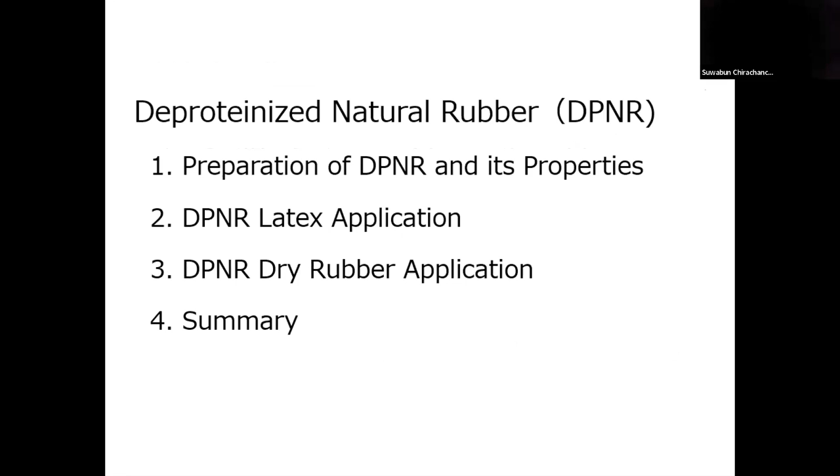Proteins are decomposed by added enzyme and replaced by surfactant. This treated latex is then diluted with water and DPNR is obtained after eliminating the decomposed protein through centrifugation. This scheme shows the actual production process of DPNR latex.

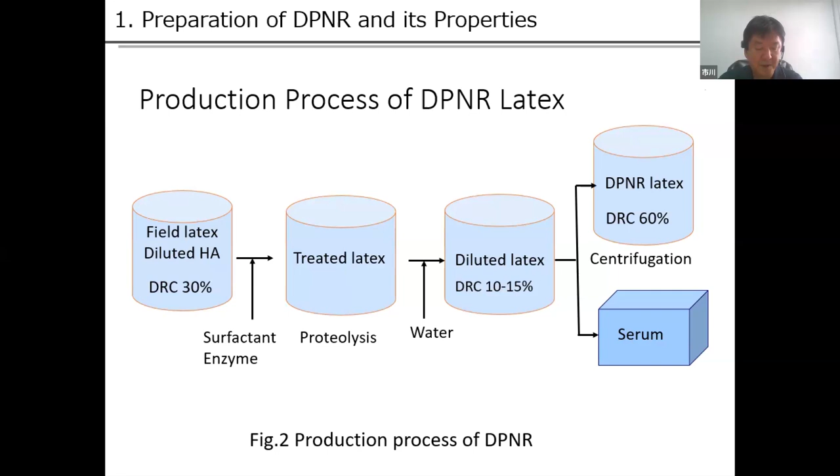We can use field latex or concentrated latex as raw material. Obviously, cost-wise, field latex is more advantageous. The degree of deproteinization depends on the activity of the enzyme and the dilution rate before centrifugation. We use highly active proteolytic enzyme and dilute treated latex to 10 to 15% DRC before centrifugation.

This table shows the specification of our DPNR latex. We have two grades of DPNR with different nitrogen content. The nitrogen content is measured by the Kjeldahl method. Nitrogen content is used as an index of residual protein quantity. Later, I will explain the allergenicity of DPNR latex.

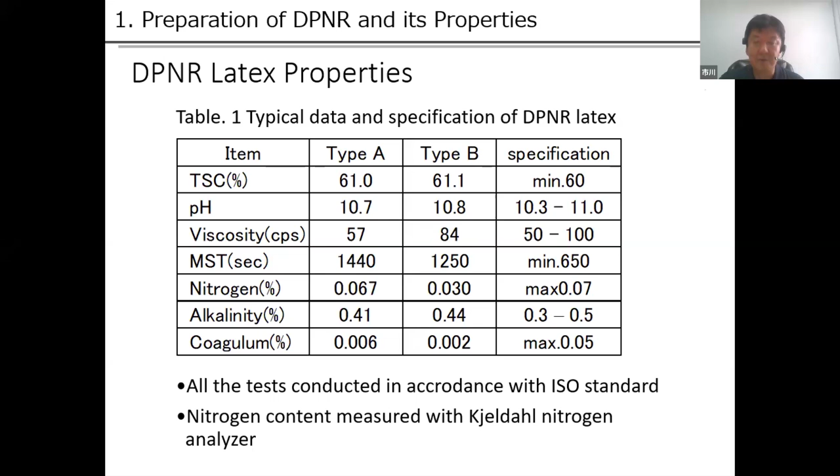Viscosity increases with deproteinization, and enough mechanical stability is obtained by selecting the surfactant. At the same time, sensitivity to coagulant is adjusted by selecting the surfactant. This figure shows the film thickness of DPNR latex and high ammonia natural rubber latex at different coagulant concentrations. DPNR latex has almost the same sensitivity as high ammonia natural rubber latex.

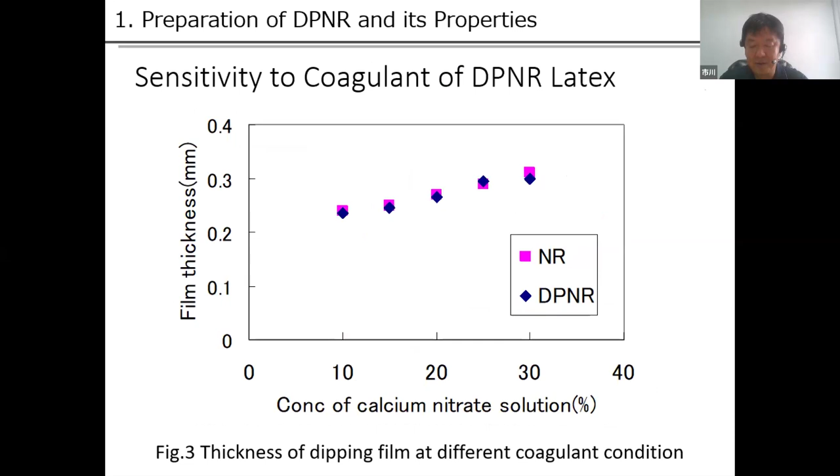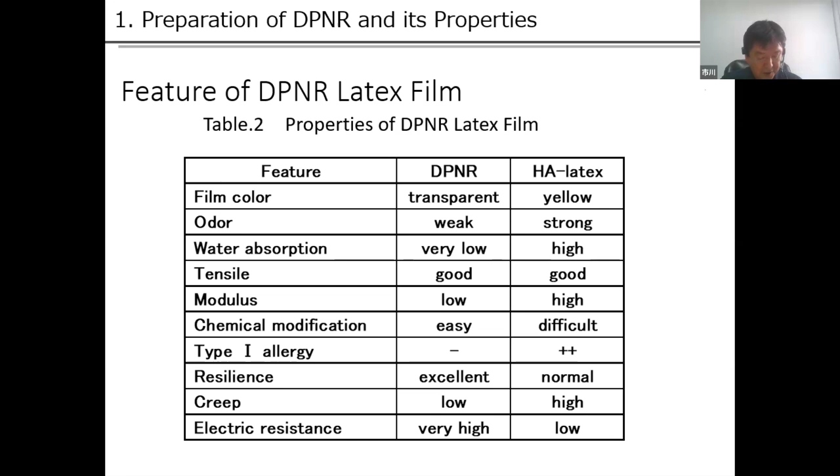Next, I show the summary of the features of the film obtained from DPNR latex. Film color of DPNR is transparent, odor is weak, water absorption is very low, modulus is low, chemical modification type 1 allergic reaction is negative, resilience is excellent, creep is low, and electric resistance is very high.

Here I show the IR spectrum of DPNR and NR. We can see the difference at 3300 wavenumbers. NR shows strong absorption, but DPNR does not show absorption because proteins are decomposed and removed. We can differentiate DPNR from NR.

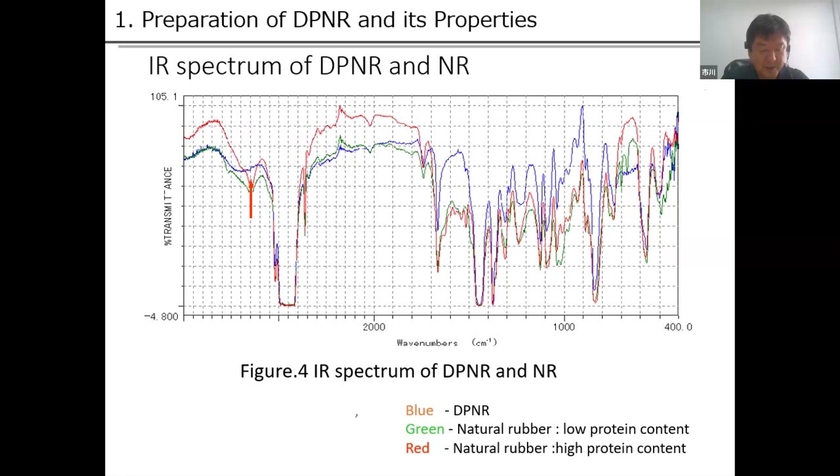We also measured antigenic protein content from the result of a LEAP assay. Antigenic proteins could not be detected from DPNR latex film.

DPNR latex can be used for many applications which utilize its features, especially low allergenicity and softness. We apply DPNR to these purposes.

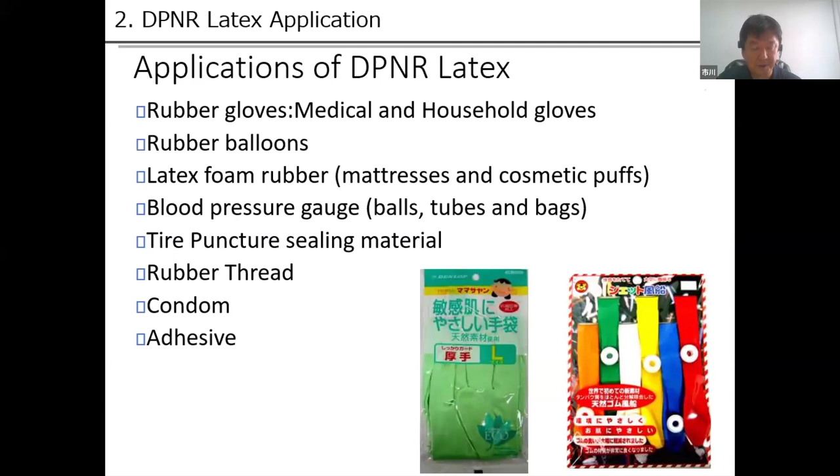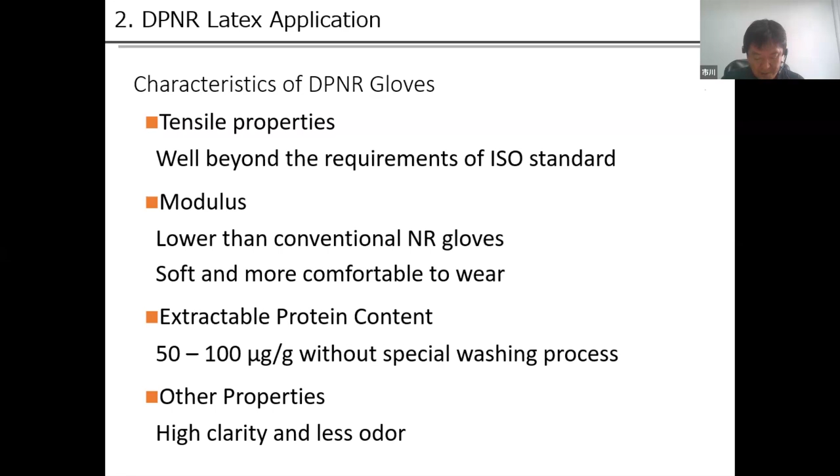I will talk about allergenicity of DPNR glove. At first, I talk about extractable protein content. This figure shows the residual extractable protein in commercial gloves. The EP content was measured by ASTM standard method that is modified slightly. As you can see, EP content of recent commercial gloves are well controlled to less than 100 microgram per gram. Our DPNR gloves are found to be in the same EP level.

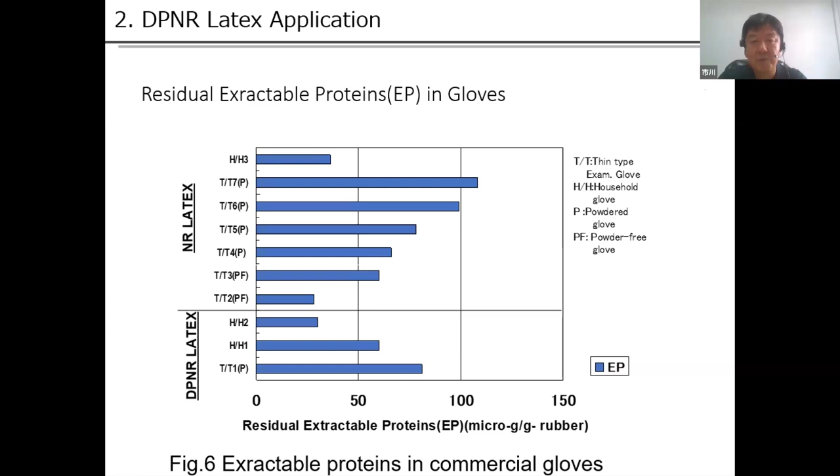This graph shows the relation between extractable protein content and allergen protein content. Theoretically, extractable protein quantity should be proportional to the allergen protein quantity, but in the case of DPNR, allergen proteins are extremely low against the extractable proteins.

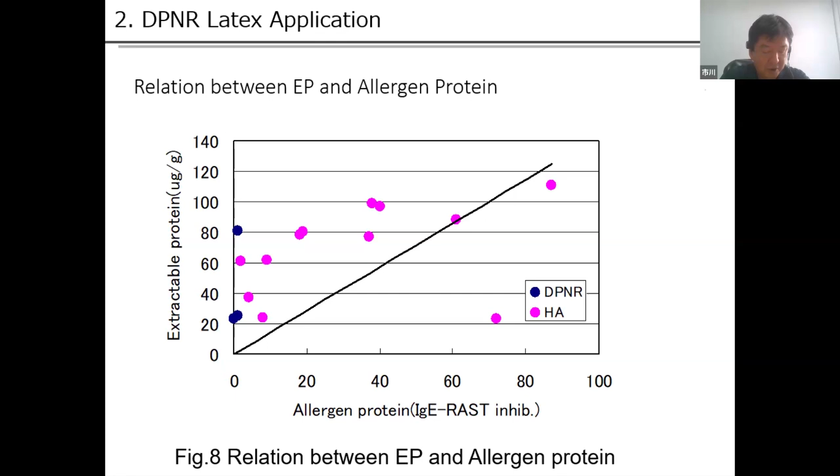This diagram is easy to understand the said relation. Now DPNR is the same EP level as NR. But allergenic protein is not detected in DPNR while it is highly detectable in NR.

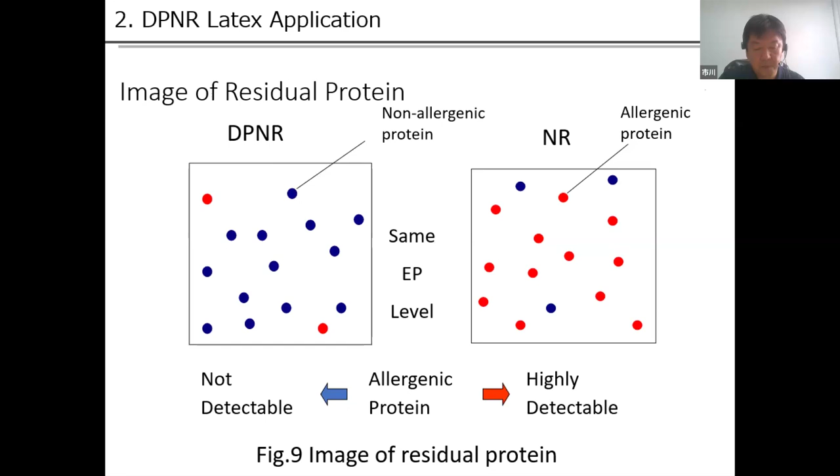Next, I will show the result of clinical testing. One is use testing with one finger of a latex glove for one allergenic patient. This test was carried out in Nagoya University School of Medicine. In this case, the DPNR glove allergenic reaction was negative, while the normal NR glove showed positive.

The other is a scratch prick test with 23 allergenic patients. This test was carried out in a total of 13 domestic universities or national institutes. As you can see, our DPNR has excellent effect for patients who are allergic to protein. Extraction of DPNR glove showed positive rate of less than 10%, while extraction of natural glove showed about 80%. These results show that DPNR is effective to prevent NR protein allergy.

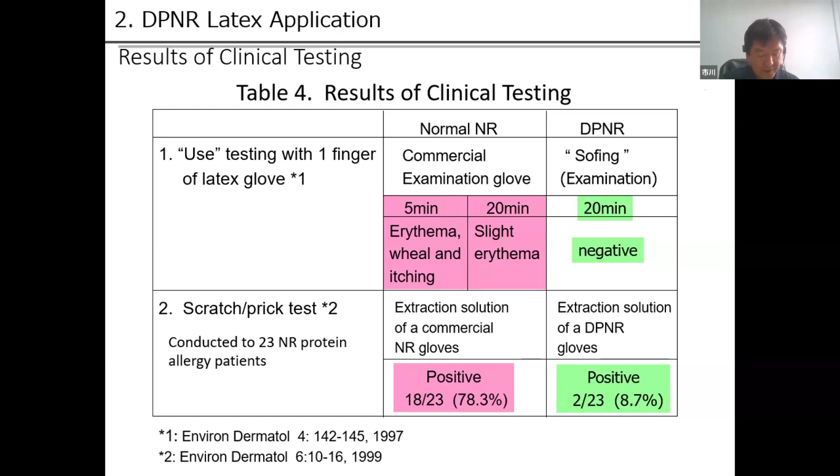Next, I will talk about DPNR solid rubber. We prepared DPNR solid rubber from DPNR latex produced by our standard procedure. DPNR latex was coagulated with dilute formic acid and dried. DPNR solid rubber has low gel content and low nitrogen content. But other properties do not show clear difference with natural rubber.

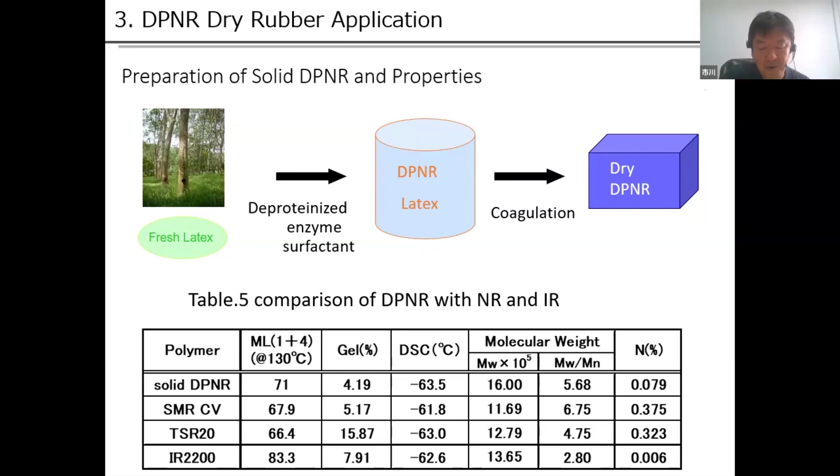We evaluate the vulcanized rubber properties of DPNR with these rubbers. Here I show the cure characteristics of unfilled compound of DPNR, NR, and IR. DPNR shows slow curing speed compared to NR. Tensile properties were well maintained and show lower modulus than NR.

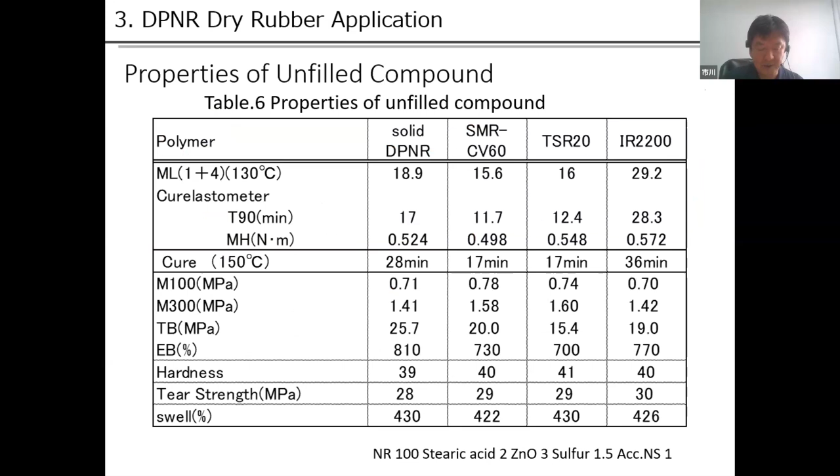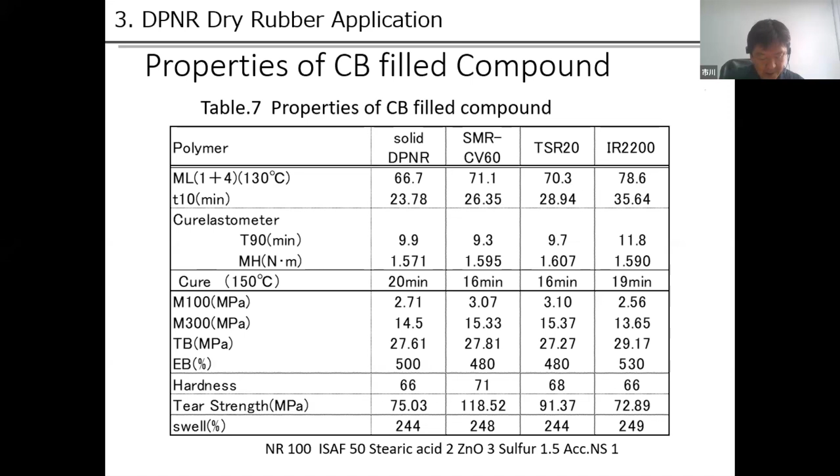Next, I show the cure characteristics of carbon black filled compound of DPNR, NR, and IR. Curing speed was not so much different between DPNR and NR in case of carbon black filled compound. Tensile properties were well maintained and show lower modulus than NR, but tear strength of DPNR was lower than NR. Tear strength was close to the tear strength of IR.

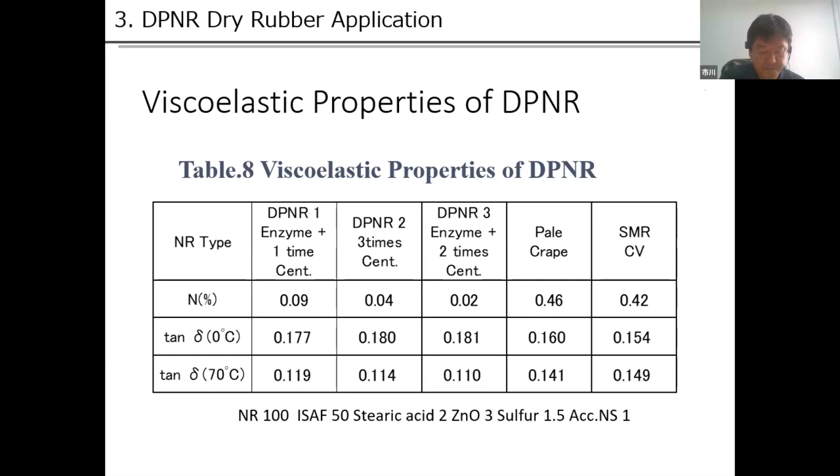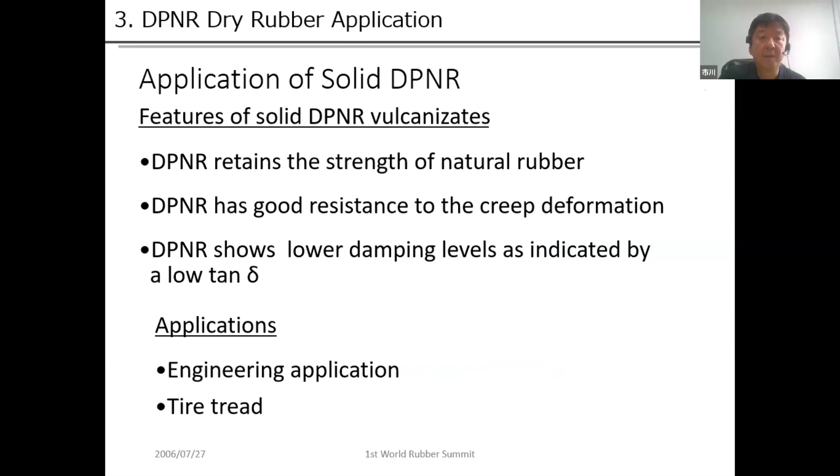Here I summarize the solid rubber features, and this is a summary of DPNR. DPNR latex products show quite less allergenic potential according to the measurement of allergen and antigens. DPNR latex products have softness and are more comfortable to wear as gloves. DPNR retains the strength of natural rubber and also has good resistance to creep deformation, with lower damping properties.

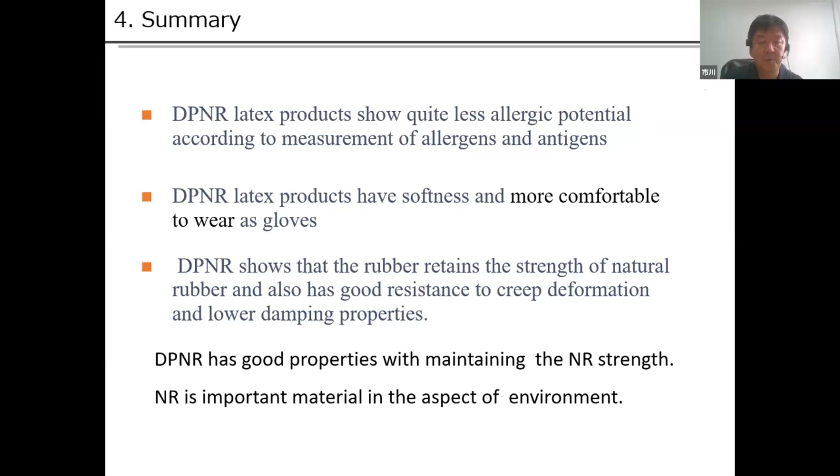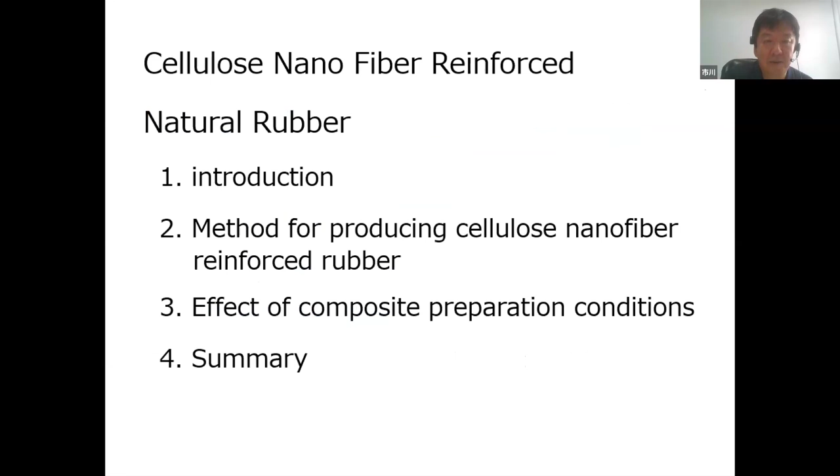I will move to the next topic, cellulose nanofiber reinforced natural rubber. I will explain following this content. At first, I will talk about cellulose nanofiber. We can get cellulose nanofiber by decomposing a cell wall from plant tissue. Cellulose nanofiber has high strength, low thermal deformation, and low weight, and it is an environmentally friendly material.

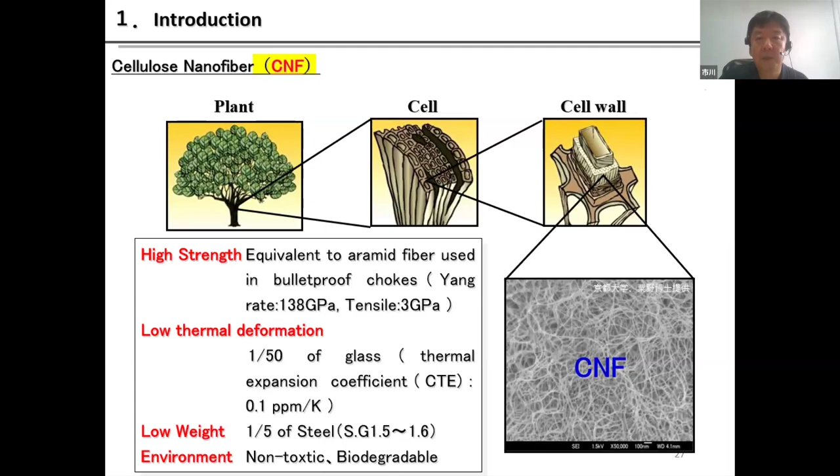To develop tire compound, we have to develop techniques utilizing the characteristics of CNF: high rigidity, low specific gravity, and natural resources. Then we can improve tire performance and promote the development of elemental technology necessary for manufacturing with low dependence on oil resources.

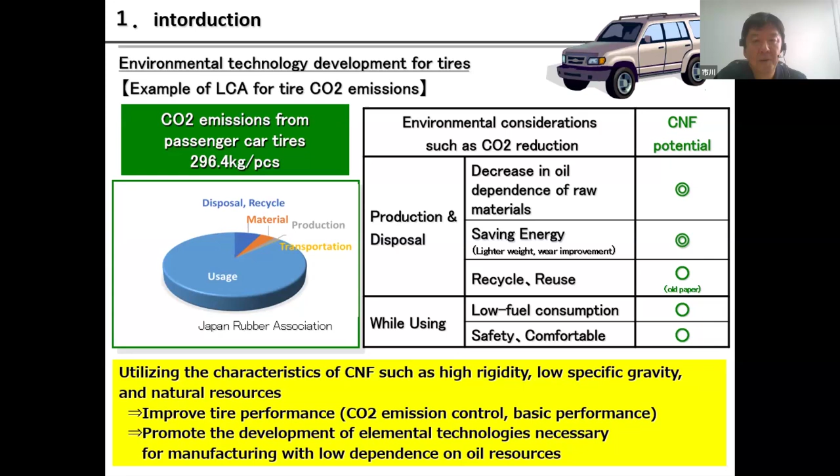And we can get CNF from many kinds of plants, from tree to cotton and bamboo. We can get it from many plants.

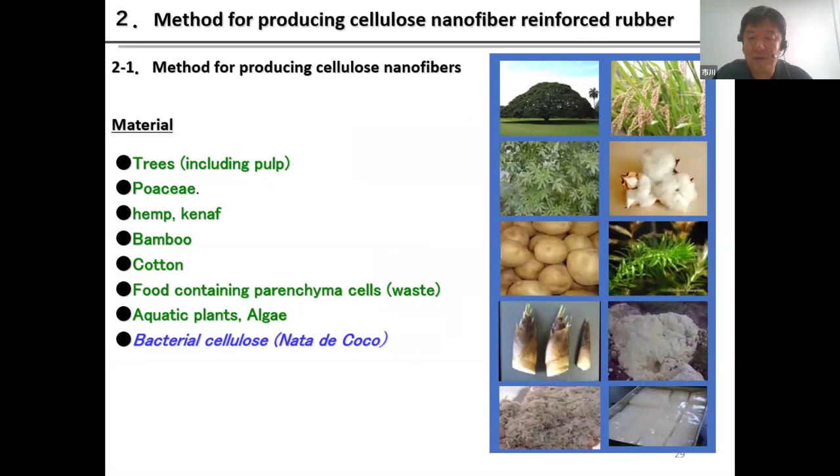Here I will explain the preparation method for cellulose nanofiber and rubber composite. Firstly, I explain a method for producing cellulose nanofiber. As I told, CNF can be obtained by loosening plant tissue into small pieces. We can get CNF using equipment with physical stress, like high pressure homogenizer, grinder, or screw extruder.

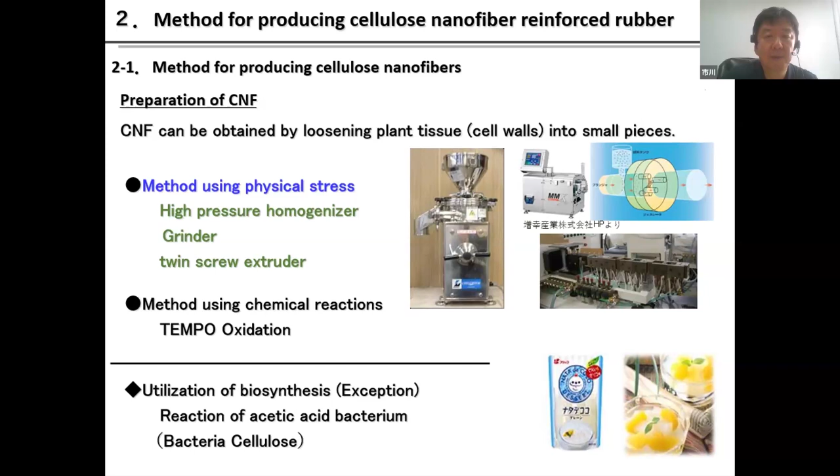We can get CNF by chemical treatment like TEMPO oxidation. And some bacteria produce cellulose nanofiber also. I show the example for preparation method.

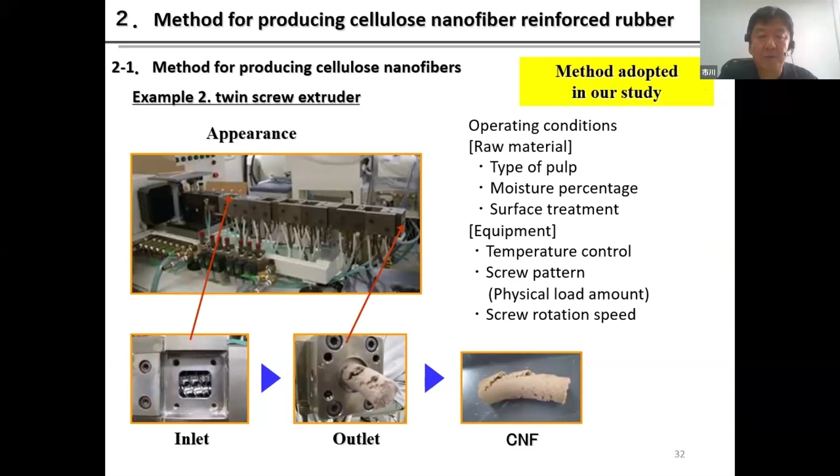One is grinder. Using a grinder, we can get CNF through the grinder slit. In our study, we use a twin screw extruder to prepare CNF, changing raw material condition and equipment conditions. We supply wood pulp to the twin screw extruder. After passing through the twin screw extruder, we get CNF.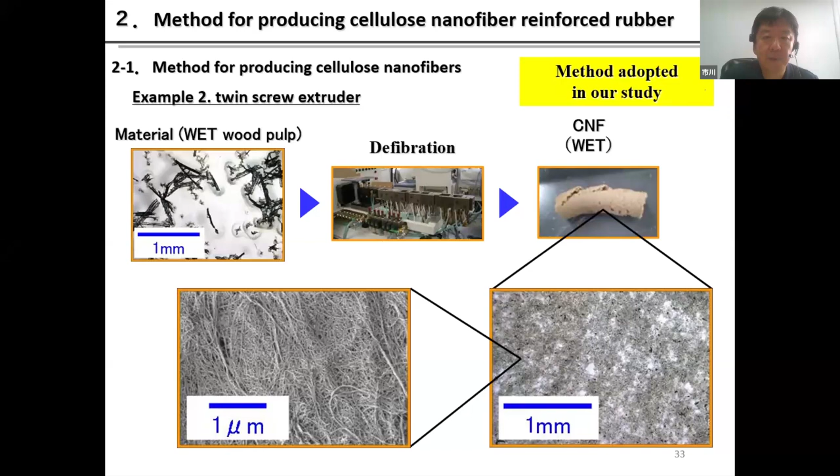Next, I show the composite method of CNF and rubber. If we try to make a composite at dry condition, CNF cannot be dispersed in rubber because of strong intermolecular interaction. We get a morphology where it still remains a fiber. So we use a wet blend method: we make a composite CNF slurry with rubber latex, mix, then coagulate and dry. Then we can get the rubber CNF composite.

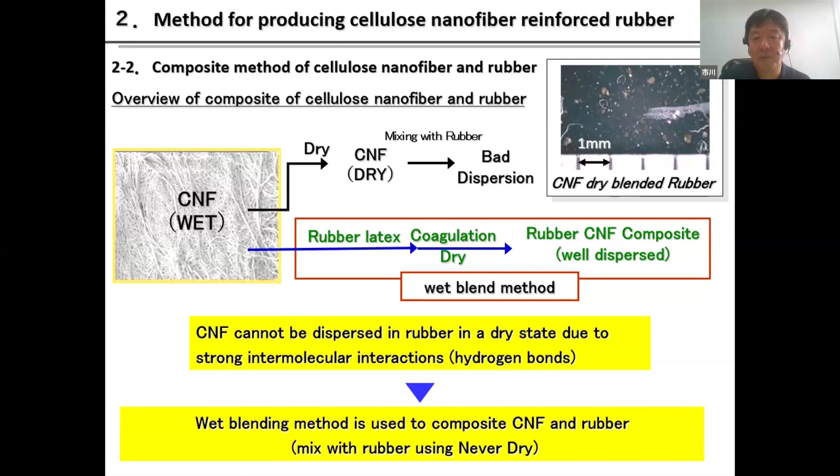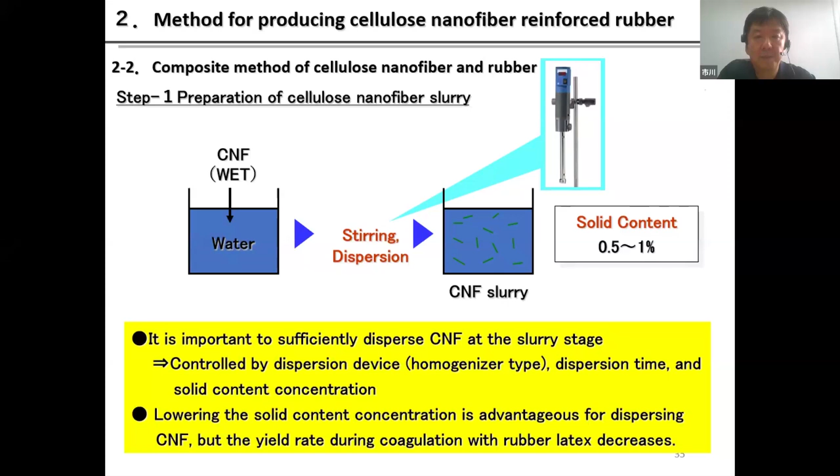I'll show you the actual process from slurry preparation. We put the CNF into water and stir to disperse it into water. We have to control solid content because the water becomes very viscous. Then we apply solid content of 0.5 to 1%. After getting CNF slurry, we mix with latex and stir, then coagulate, wash, dehydrate, and dry. Then we can get CNF and rubber composite.

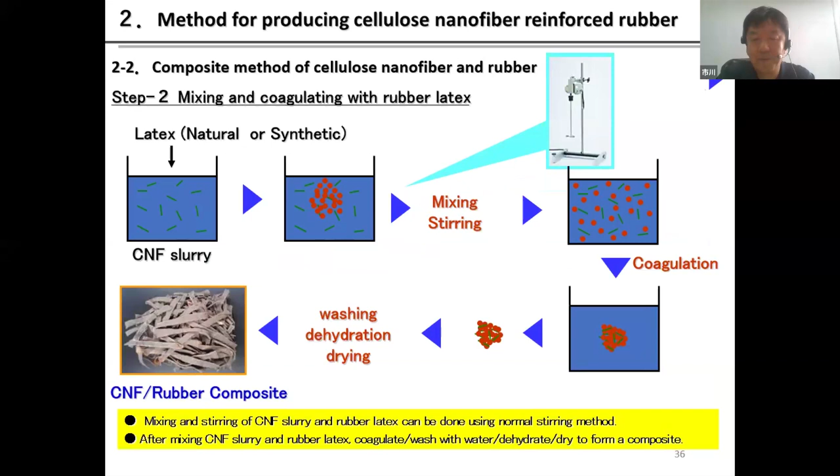After getting a composite, we plasticize the composite with a 2 roll mill or internal mixer. Then we add a compounding agent and vulcanizing agent. After mixing, we vulcanize at 150 to 170 degrees Celsius. Then we get the CNF reinforced rubber vulcanizate.

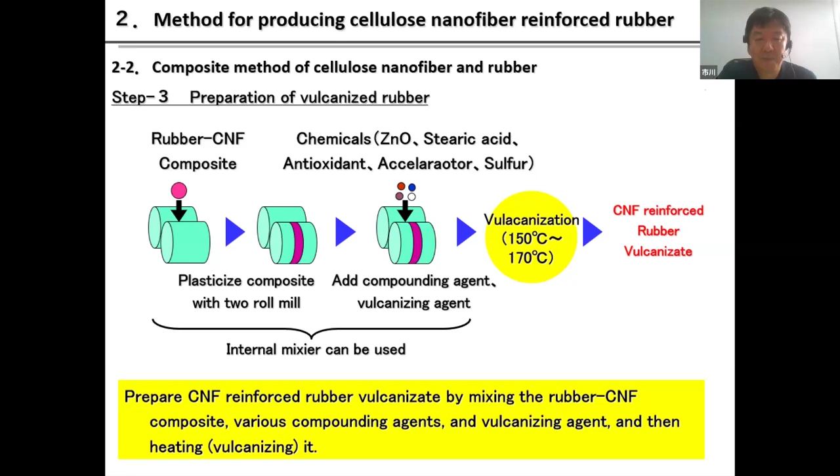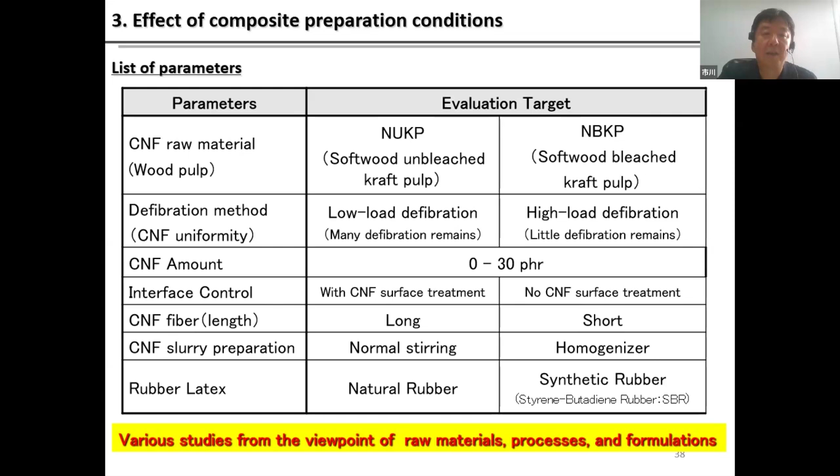We change the parameters: raw materials, process, and formulation. Then we study the effect of these parameters. At first, I show you the result.

We use unbleached kraft pulp and bleached kraft pulp. In case of bleached kraft pulp, it contains no lignin, but in case of unbleached, we get lignin content of 5 to 7%.

This is the SS curve of CNF reinforced rubber. NUKP contains lignin, and NBKP has no lignin. Natural rubber vulcanizate reinforced with NUKP-derived CNF has the same elongation at break, but higher rigidity and higher strength. Lignin affects the rigidity in this case.

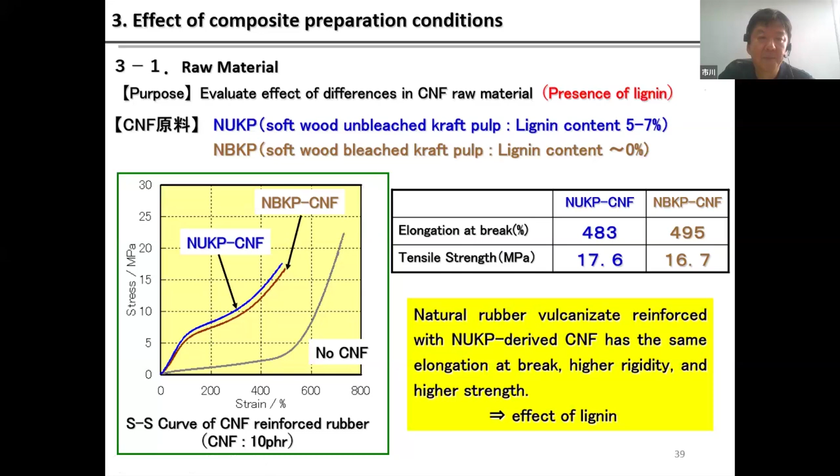Next, I show the effect of different defibration levels. We change the defibration load, low and high. In case of low load, many undefibrillated fibers remain. In case of high load, undefibrillated fibers remain little.

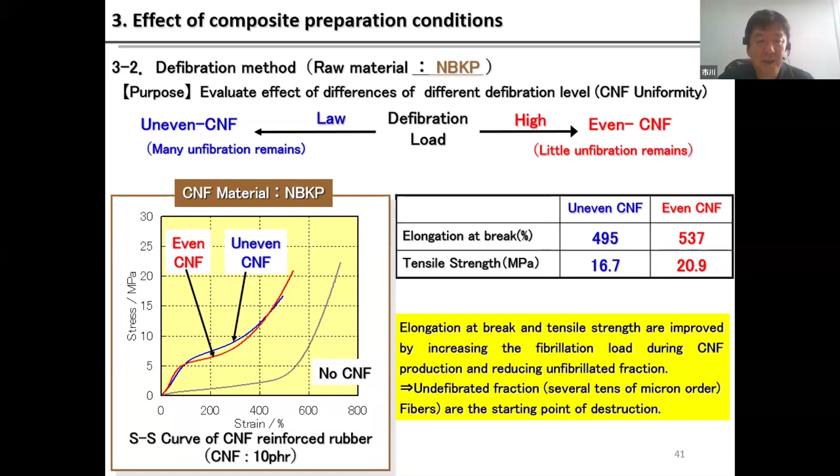This is in case of NUKP, and next is NBKP, needle bleached kraft pulp. We can get the same result with NUKP.

Next, evaluate the influence of CNF amount introduced on rubber properties. We put 10 phr, 20 phr, 30 phr. Result is this: increasing the amount of CNF introduced improves the elastic modulus. However, it is accompanied by a decrease in elongation at break. So it is necessary to control the amount of CNF introduced by considering the balance between rigidity and fracture characteristics.

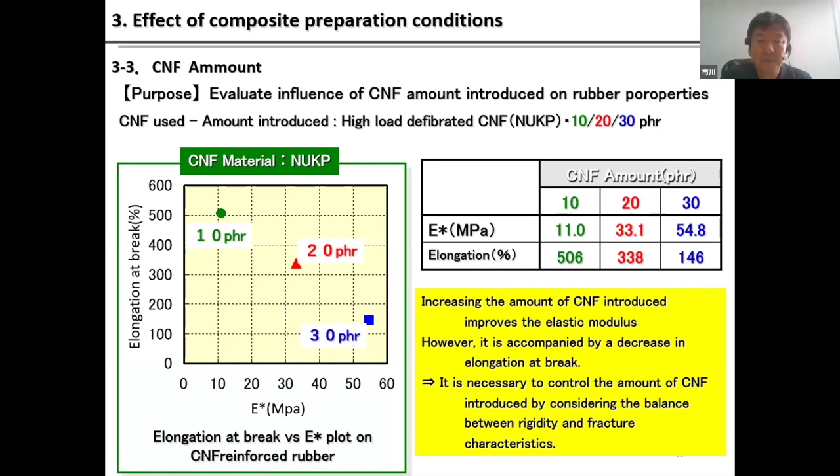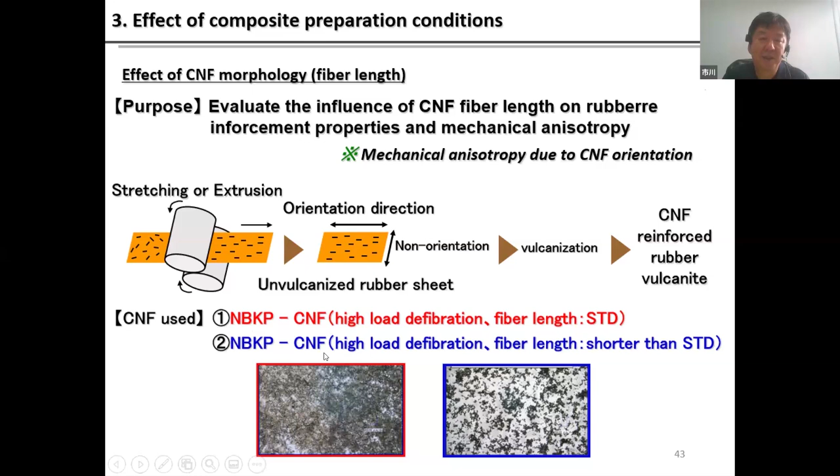Next, I show you the evaluation to know the influence of CNF fiber length on rubber reinforcement properties and mechanical anisotropy. After cold roll mill or extruding, CNF oriented in this direction, so we check the effect of this orientation. And we use two kinds of CNF: one is standard length CNF, another one is shorter CNF.

Here I show SS curve of rubber itself and rubber with shorter CNF and standard CNF. If we put the standard longer CNF, we had higher modulus. And if we see the anisotropy between orientation direction and other direction, in case of longer CNF, it has difference. But in case of short fiber length, even in different directions, it is not so much different. So fiber length has a strong influence on the stiffness of rubber, and mechanical anisotropy becomes apparent as the fiber length increases.

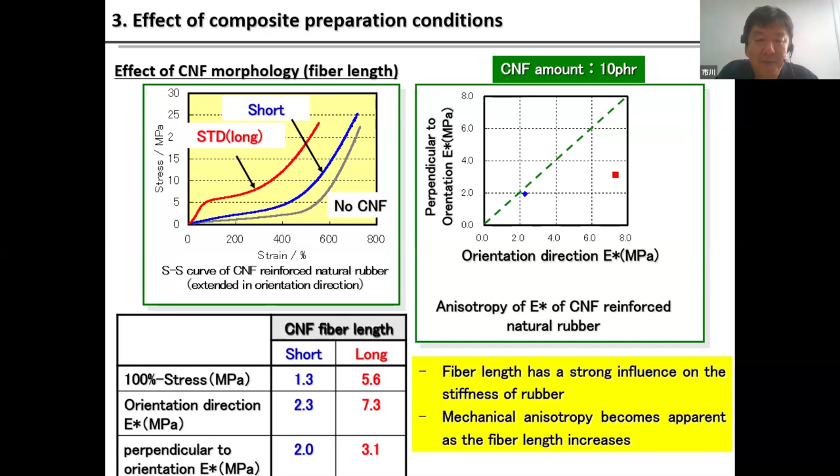I explained when we put CNF into natural rubber, but here I show you the difference when we put CNF into natural rubber and SBR. In case of natural rubber, we can see the effect from 5 phr, but in case of SBR, we can see the effect of CNF from a higher amount. The amount of CNF introduced at which the reinforcing effect begins to appear varies depending on the rubber.

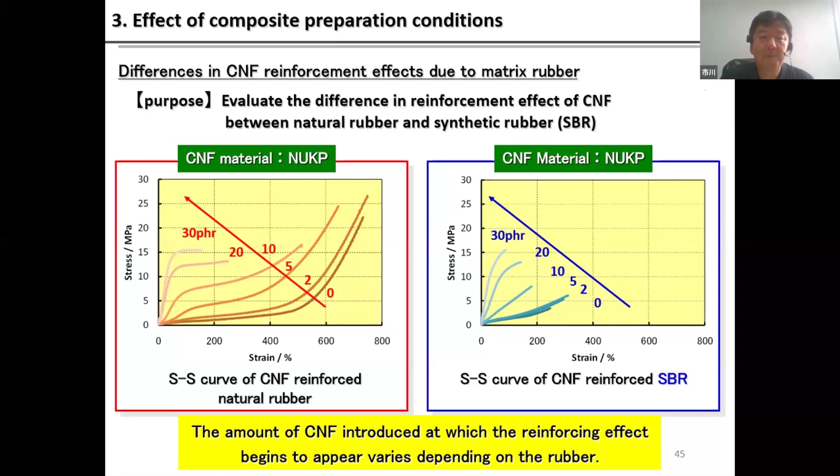Here I summarize our testing result. I didn't explain about interface control, but rubber-CNF interface affects fracture properties. I think this is an important matter for this development.

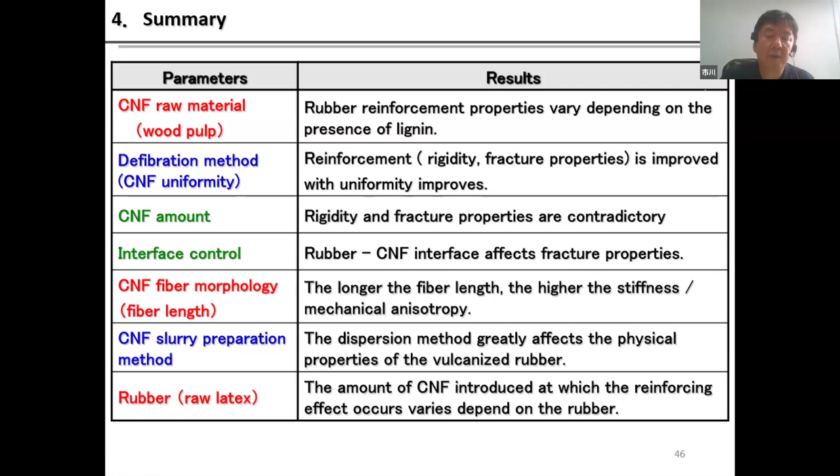Next, I want to move to the final topic, current issues for the natural rubber industry. Natural rubber absorbs CO2, and wood is used for it, so... is natural rubber really a sustainable material?

Just now I showed that rubber trees absorb a lot of CO2 to grow and produce latex, which ends up in thermal recycling to CO2. From this circulation, natural rubber itself is a sustainable material.

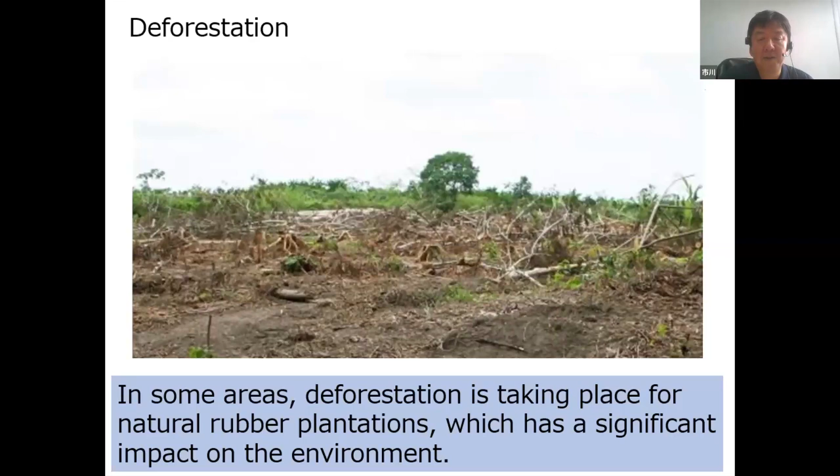But actually, deforestation is taking place for natural rubber plantations, which has a significant impact on the environment. And labor issues: yield varies by region and has a significant impact on the income of smallholders and tappers. They may also be placed in harsh working environments.

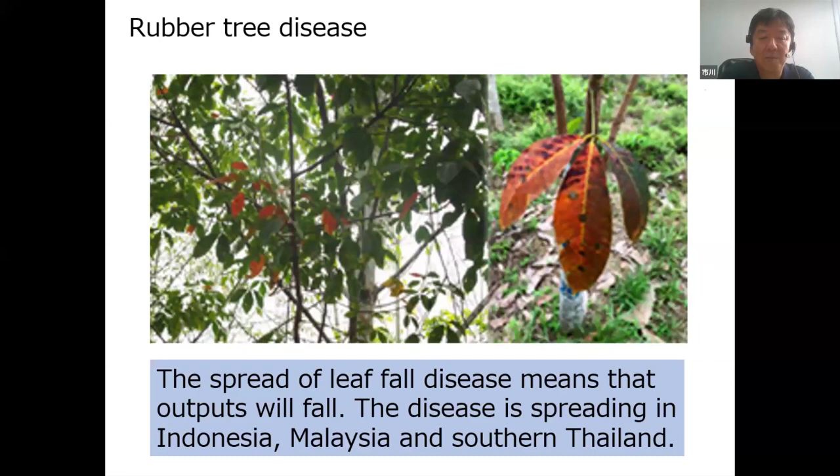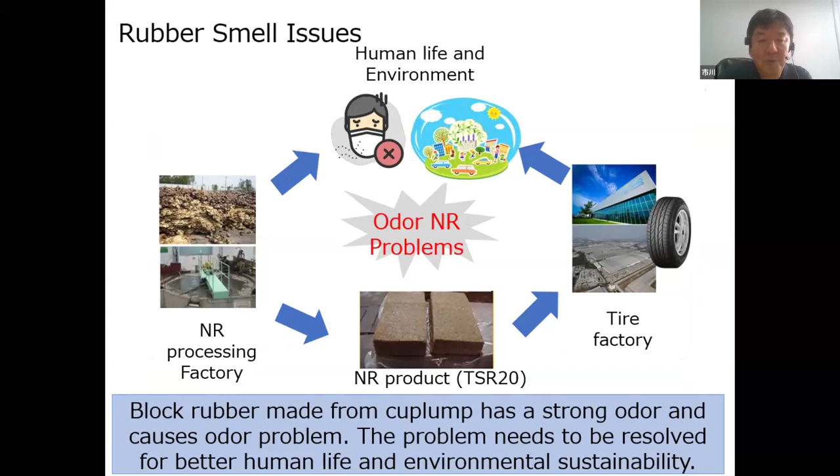And rubber disease: the spread of disease means that output will fall. The disease has spread in Indonesia, Malaysia, and southern Thailand. And rubber products have a smell issue. Block rubber made from cup lump has a strong odor and causes odor problems. This problem needs to be resolved for better human life and environmental sustainability.

In this situation, many challenges must be addressed and resolved to create and maintain a sustainable supply of natural rubber: environmental issues, social issues, and economical issues.

One is global sustainable initiatives. The Sustainable Natural Rubber Initiative, SNRI, was established in 2014 as a member voluntary collaborative project under the International Rubber Study Group framework.

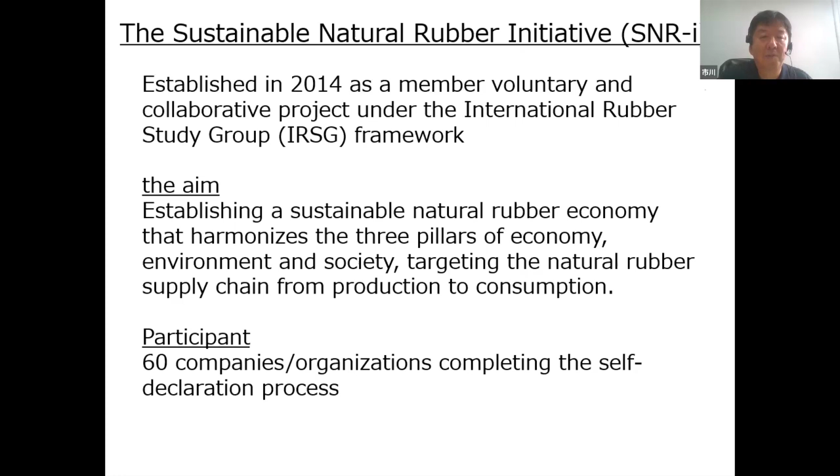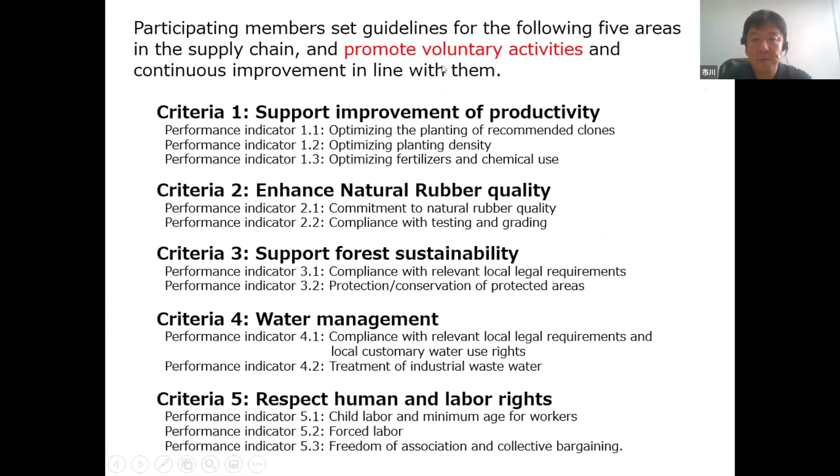The Global Platform for Sustainable Natural Rubber, GPSNR, established in 2018, led by major manufacturers, was established as an international platform for a sustainable natural rubber supply chain. This is also for a sustainable, equitable, and fair natural rubber value chain. GPSNR is setting up an assurance model based on a risk-based approach.

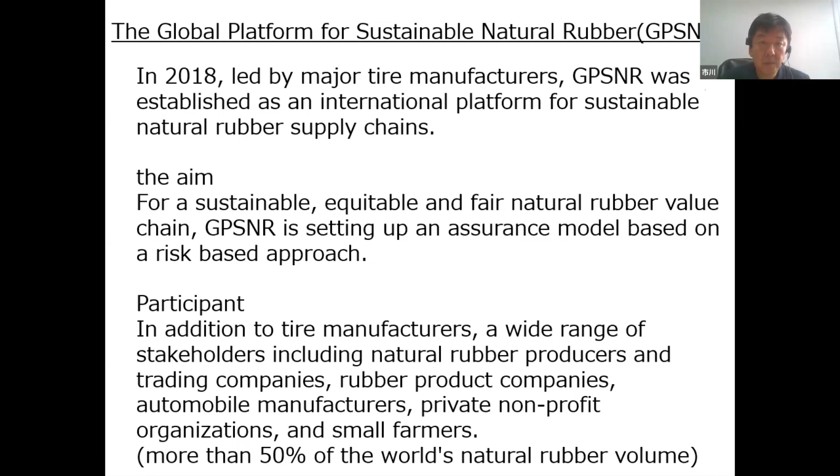Members act on a shared responsibility framework with three pillars: shared investment, value transfer and global setting, and knowledge and data sharing. And the policy component of the framework is spread across eight themes with commitments to it.

Currently, companies and organizations are working to build a joint natural rubber value chain based on the GPSNR framework, and to enhance the sustainability of natural rubber through their own activities based on SNRI. From here, I will show you our activity toward sustainability. Sumitomo Rubber Group established a sustainable natural rubber policy.

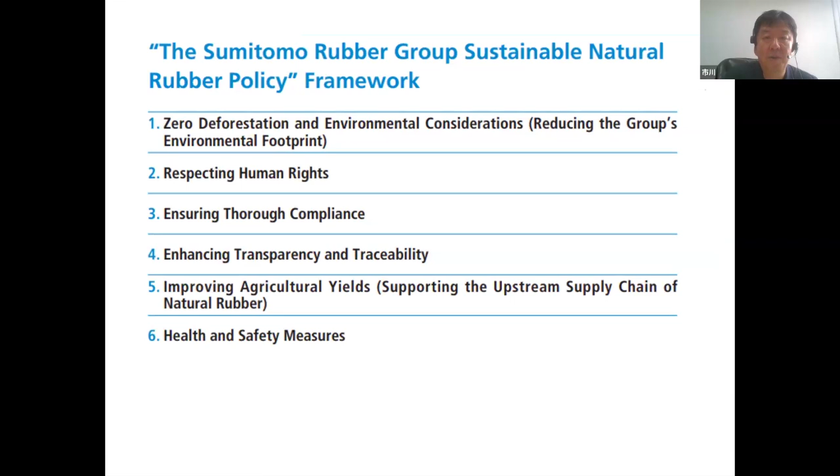This is a sustainable natural policy framework of Sumitomo Rubber Group. Sumirubber Thai Eastern Corporation also conducts activity for sustainability of natural rubber in accordance with the policy of the Sumitomo Rubber Group.

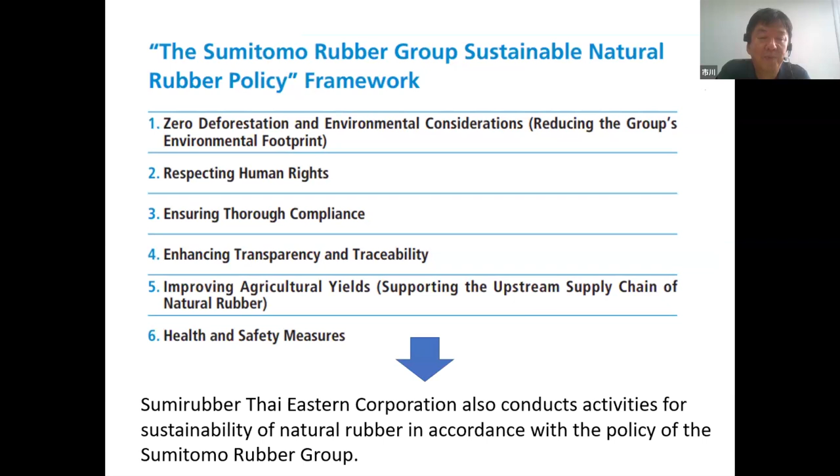Our activity for today, I will talk about our activity for sustainability: development, low odor natural rubber, environmental measures at factory, and upstream support activities.

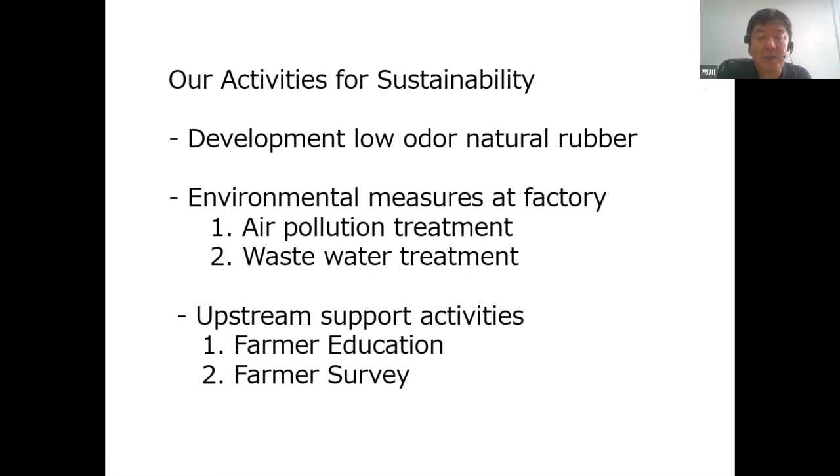At first, I explain about odor natural rubber problem. This problem needs to be resolved for better human life and environmental sustainability. From the material to product, we have to improve. For this purpose, we developed the less smell rubber. At first, we investigate the cause and actual process giving natural rubber odor, and find the improvement method for reducing bad odor at the factory.

I show the process from plantation to our final product. In our factory, we storage the cup lump, wash and dry, and make the final product. During this process, we investigate the cause of odor and find the improvement method for reducing the odor.

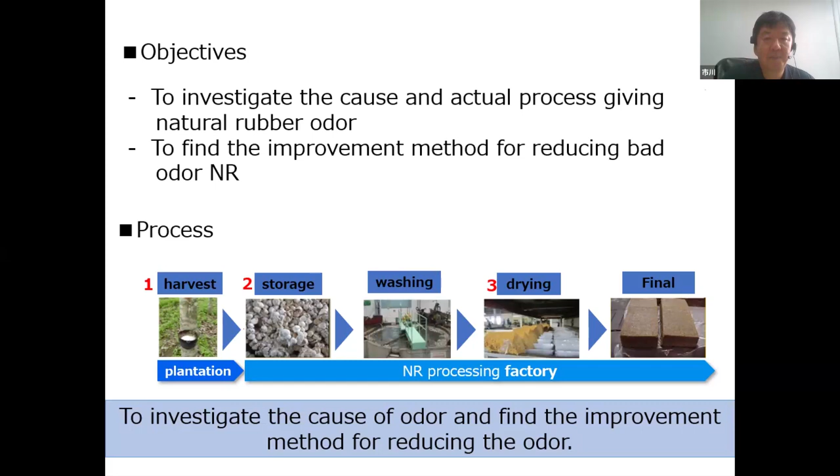I show you the source of odor in commercial TSR 20. One is short chain fatty acid. This is generated during storage by spoiling, and other chemicals are generated by heating. So substances which cause odor were generated during storage and drying process.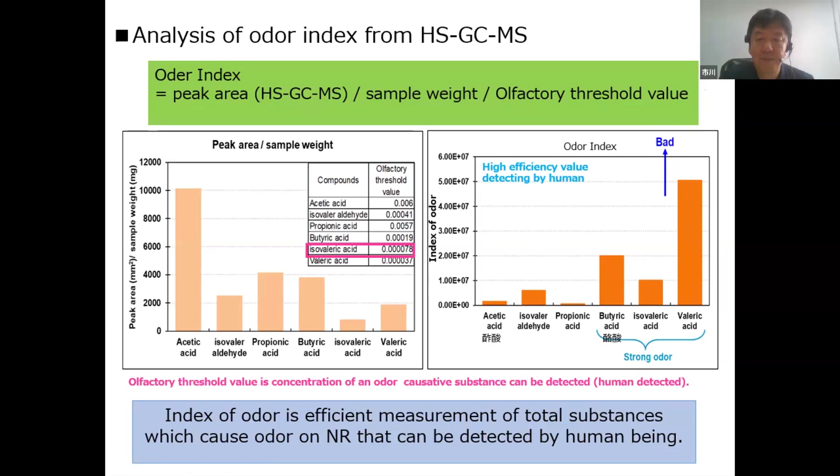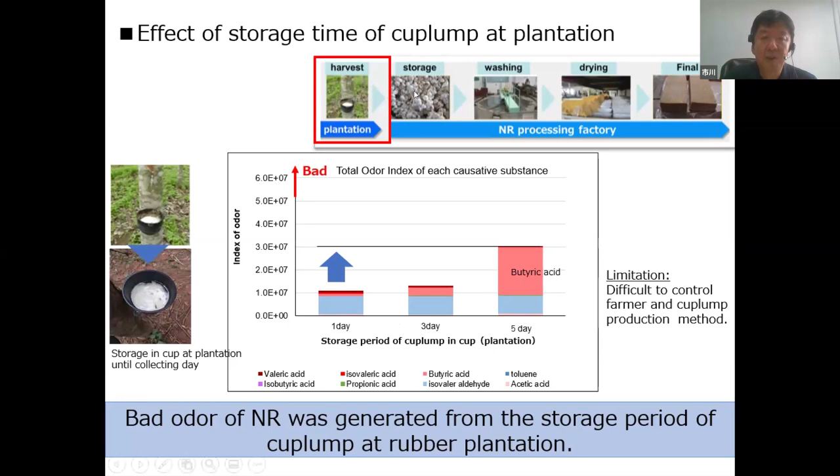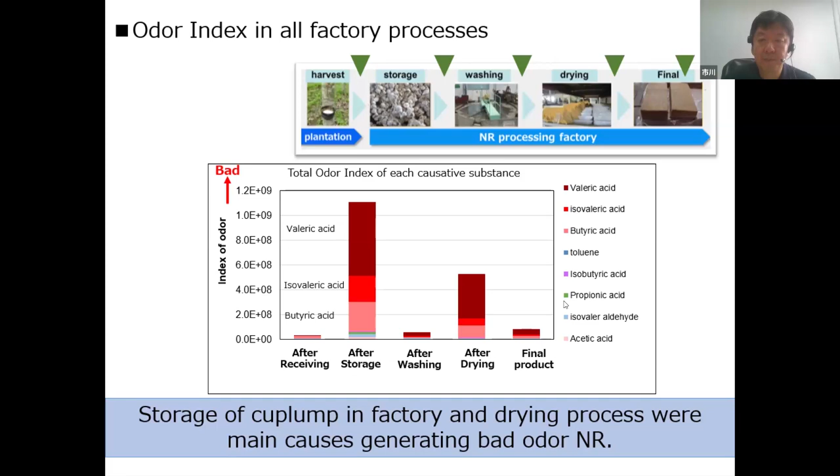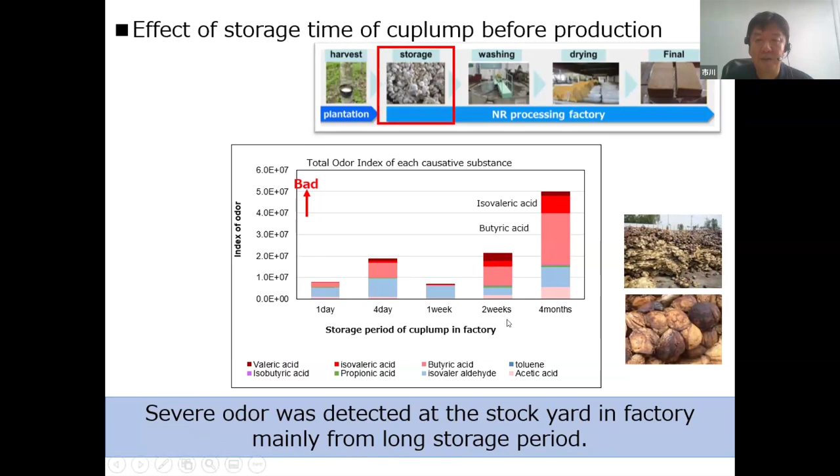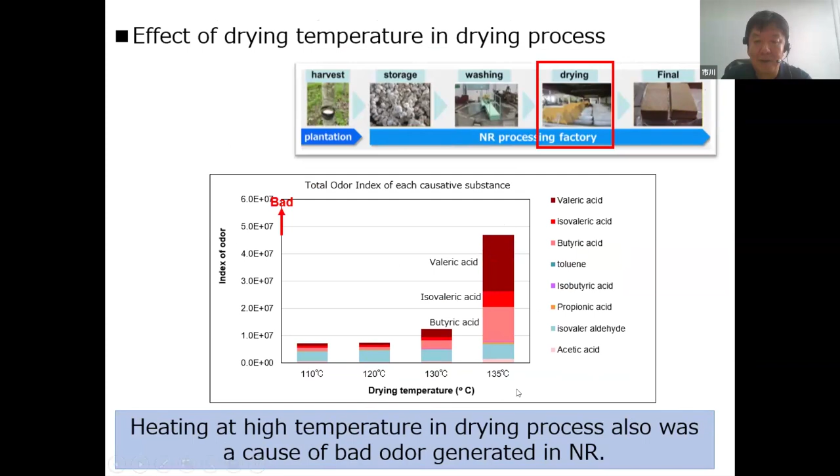Next, I show the effect of drying temperature in the drying process. Heating at high temperature, like 135 degrees, was also a cause of bad odor generated in NR. So we cut and wash the cup lump just after receiving from the plantation, and we try to reduce the drying temperature. Then we can lower the odor level. We succeeded in getting low odor NR through production process improvement.

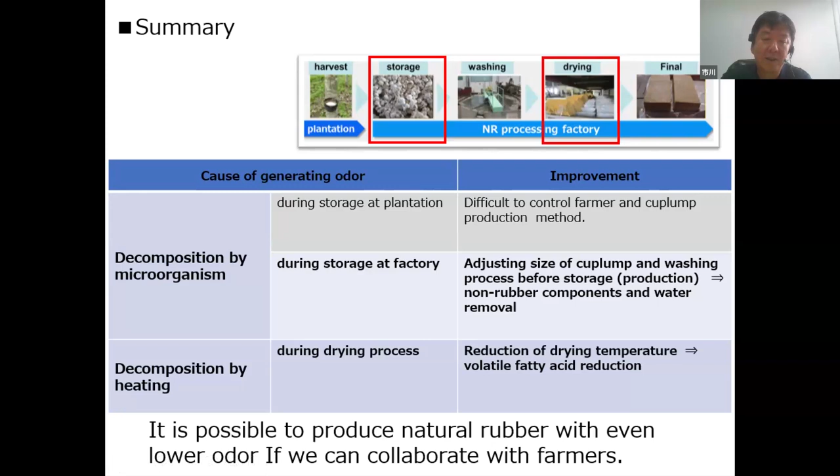At the plantation, we cannot control this part, but by controlling our storage and drying conditions, we can produce natural rubber with lower odor. If we can collaborate with farmers, we can produce less odor natural rubber.

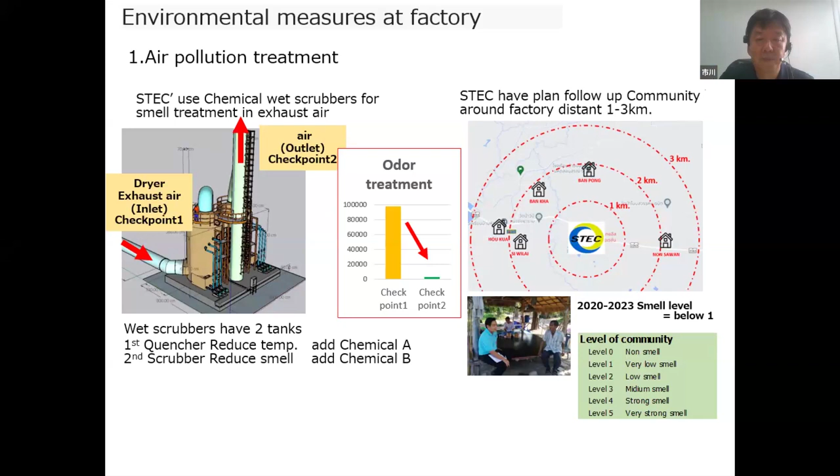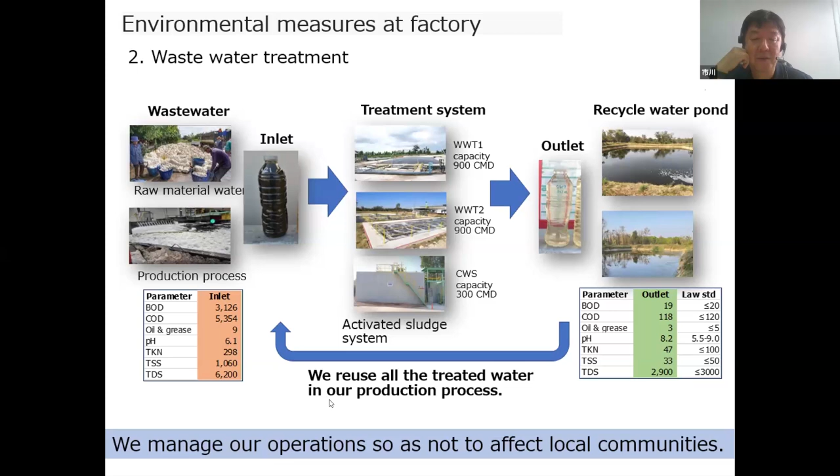Next, wastewater treatment. In our factory, we use 2,000 cubic meters of water per day, so we have 3 water treatment systems. We treat all the water, and we reuse all the treated water in our production process. We manage our operations so as not to affect local communities.

And upstream support activities: one is farmer education. We have conducted educational activities for smallholders. Another activity is farmer survey. We conduct a farmer survey to know their situation and to confirm whether the sustainable natural rubber policy is being followed.

I summarize these last topics in order to continue using natural rubber as a sustainable material. It is necessary to address environmental, social, and economic issues. In order to carry out these measures, cooperation from upstream to downstream is necessary. Most natural rubber is produced by smallholders, and the support of smallholders is important. I expect research and development to improve sustainability through industrial and agricultural technology.

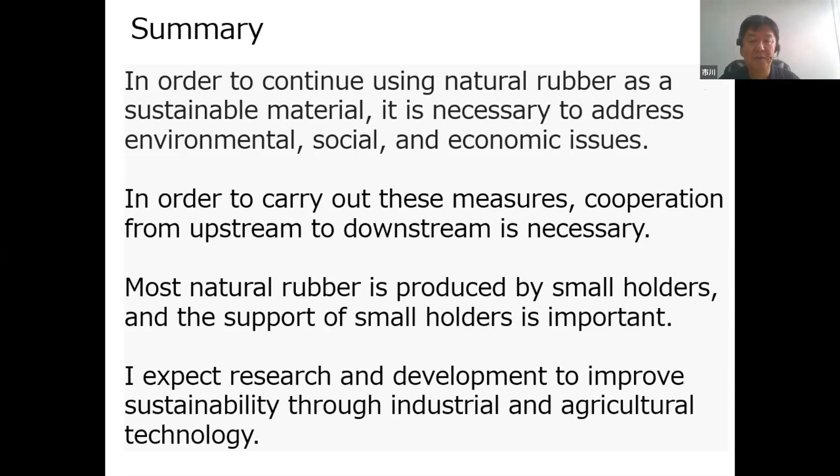Professor Tanaka received the ACS gold medal and contributed this paper to RCT. Although Professor Tanaka's research has enabled us to understand many things, there are still many things that are still unknown. Natural rubber is an important agricultural product for Thailand, and I hope that Thailand will continue to develop its technology as a producing country, including the industrial effort. Thank you for listening.

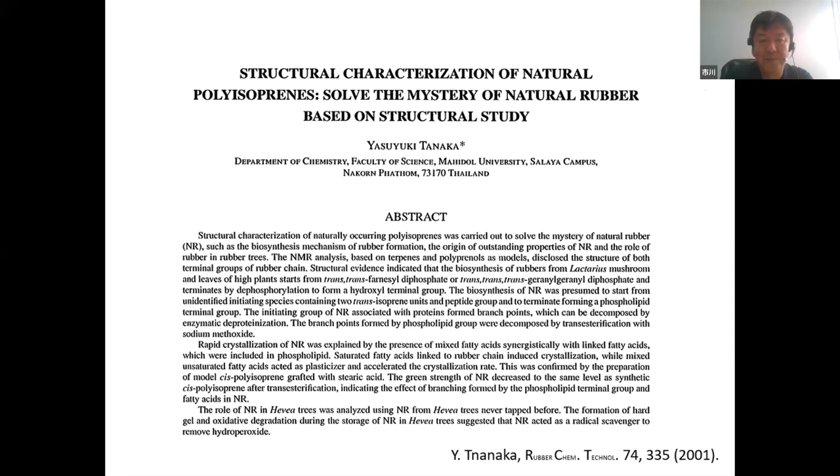Excellent. Ichikawa-san, your presentation is very useful. I think we have quite a few professors joining this conference, and they are hearing what you're saying. Three of your projects are very useful for the rubber industry.

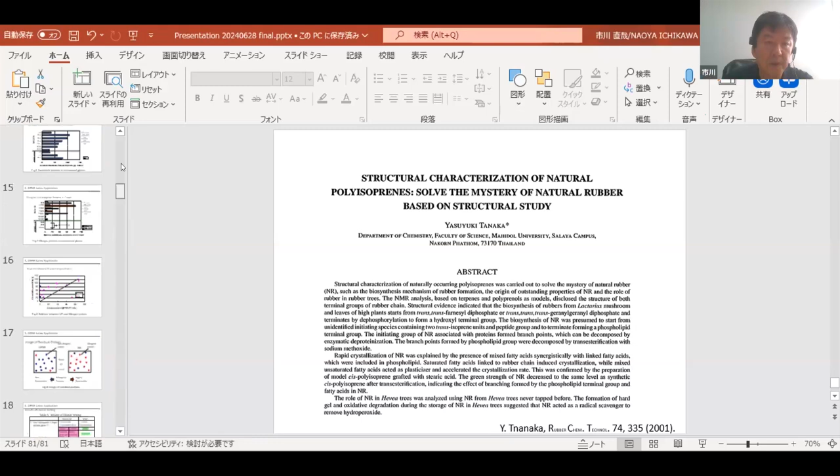The first one, you talked about DPNR. I'd like to ask you one question. You are talking about how to get DPNR by using the enzyme, and the result showing was very good, excellent. Have you already commercialized this DPNR? Yes, we commercialize in southern Thailand, and we use this DPNR latex in our Malaysian rubber glove factory. Oh, so you already commercialize this in the Malaysia glove industry already. Yes. Excellent, this is what they are looking for. Okay, that will be very useful for the industries.

The second one, you talked about reinforced natural rubber by cellulose microfibers. Yes. I saw very useful mechanical properties after you reinforce with the cellulose microfibers. Yes. When you compare to normal tires, we reinforce the natural rubber or rubbers by carbon, microfiber, and all this. When you compare that, what is really the value? The microfiber, cellulose microfiber, compared to the conventional carbon black, what's really the value?